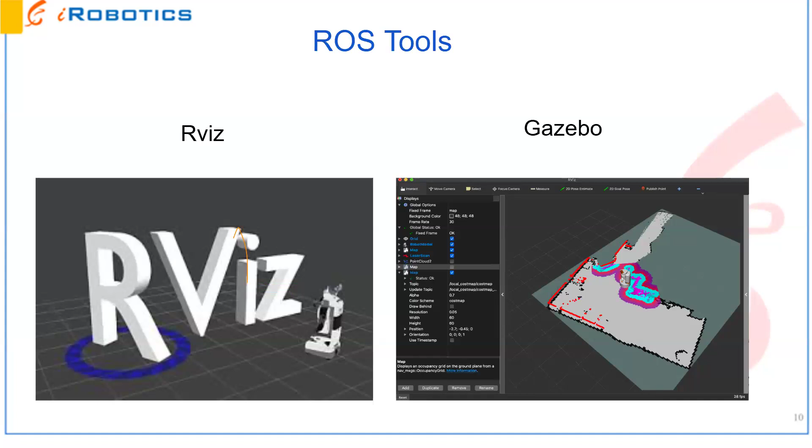Okay, so robot operating system—I told you all what it is, but how exactly does it work? There are a few concepts we need to know to understand ROS. First is a node.

So the topic is in the middle, between one node and another node. But what is the data that is getting sent to the topic? That message, that data which is being sent to a topic, is called a message. And we have two sides, two nodes.

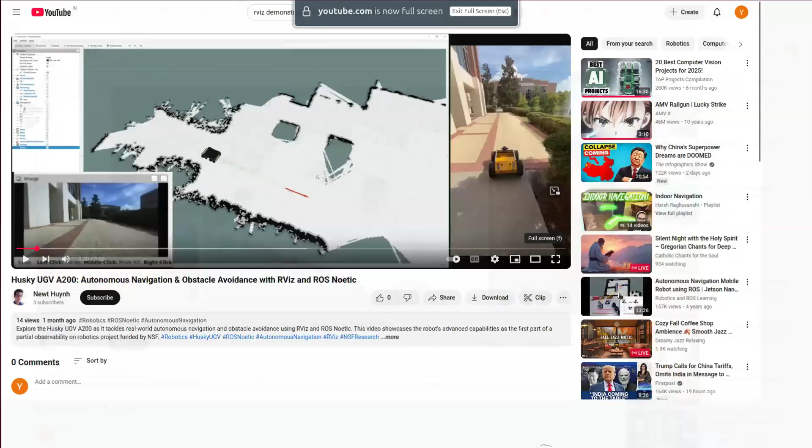Okay, so I'll show how it is actually implemented in real life. Before that, I can show a video that we have done. We have implemented ROS in Vision. So this is the Linux environment. Here we are using ROS 1. This is the main process that you need to run to start ROS in ROS 1. After this, you need to source the virtual environment.

This is on the Jetson Nano. So we had an external SD card, and we need to say you have to look into this SD card. Then again, you can see I'm looking at ROS topic list. Now we went to a certain directory on the SD card. Once I move to that directory, now I can run the script. So this script will open the camera and it will perform a YOLO detection.

Through YOLO detection, we can come to know the XY location of the object. Once we know the XY location of the object, we can send that data to a topic, and we can subscribe to it from another place. It can be anything that subscribes to it. Here we have done it on the same PC, but this can be implemented anywhere else. So I'm publishing to this object detection topic. That has appeared now.

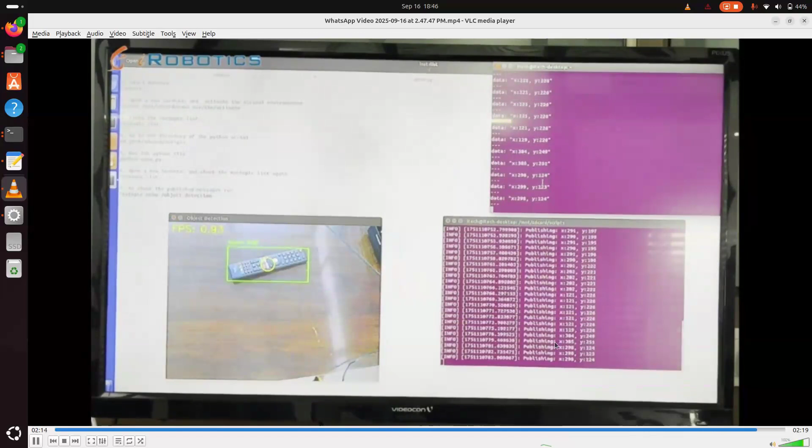And now here I'm using echo to understand what is the data being sent. So you can see here the data is being published. This is the data. And now we will try moving the object, and you can see how the values will update. So I'll just finish a little bit of the presentation that is left, and then we can look at any video.

Good evening, sir. My question is, suppose we are finding a particular object, object detection. Is there any other library other than YOLO? So you can use any library. You can use SSD, single shot detector. You can use any visual CNN, and you can integrate it with ROS. There's no hard and fast rule that you need to integrate it only with YOLO. Thank you, sir. Yes.

The main reason that we use ROS is especially because of mobile robotics, because mobile robotics has a special ROS package which makes navigation very easy, called ROS 2 Nav. ROS 2 Nav makes it very simple to integrate sensors like LiDAR, your accelerometer, your gyroscope, and even odometry, the data from your rotary encoders. ROS can also be used for mapping.

These mobile robots often use SLAM, simultaneous localization and mapping. Localization is basically coming to know where the robot is in an environment, so if the robot is placed in a room, it can know where it is in the room. And mapping is basically understanding the surroundings. So with SLAM, the robot knows where it is in the room as well as the entire surroundings.

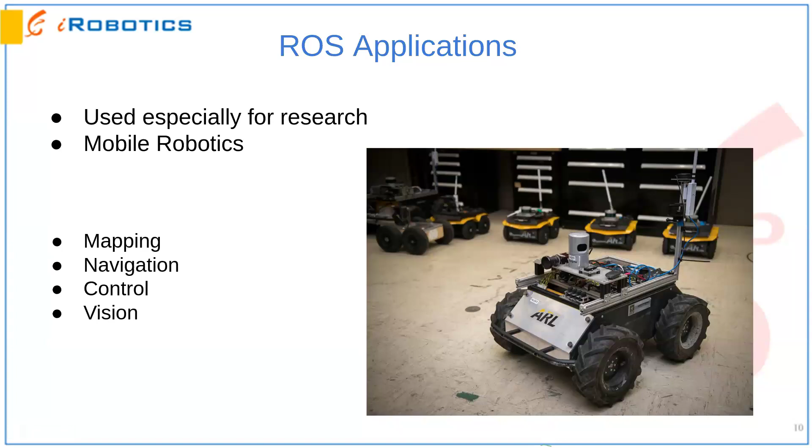So it can be used in mapping. If it detects some object close, it will send data like, I'm 4 centimeters or 5 centimeters away from an object. Then the data will be subscribed from the topic that the sensor has published, and the robot can navigate around. It can also be used in control and in vision. I showed you an example of vision, and I can also show an example of how it is used in real life in navigation through one of the YouTube videos.

So I can show you here. Sorry.

If you may recall, this is RViz, where the robot is visualizing itself. This is a platform where you can control the robot. Here is the camera feed, and here is all the real-life data. You can see the robot moving in RViz, and you can see it moving in the camera and real feed.

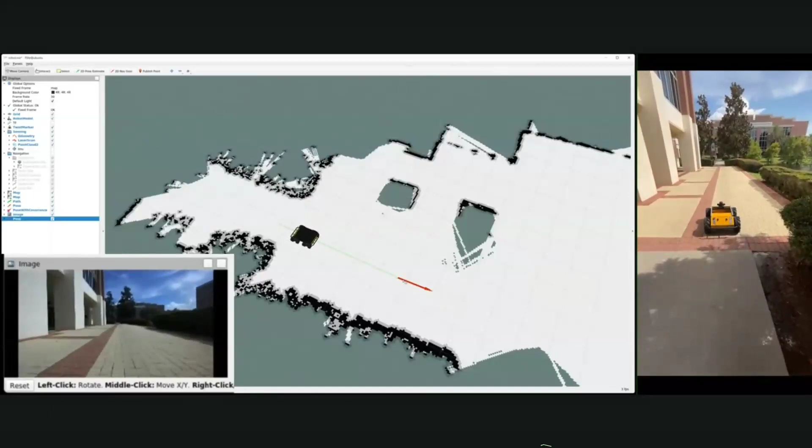There are different types of SLAM. In this SLAM, the map is already provided, so the robot already knows how to navigate, but if any obstacle comes in front of it, it can still avoid it. And if any new object has been placed in the environment, the LiDAR can map it and send it to RViz. So next time another AMR, autonomous mobile robot, goes, or if we require the latest map data, we can send it or use it.

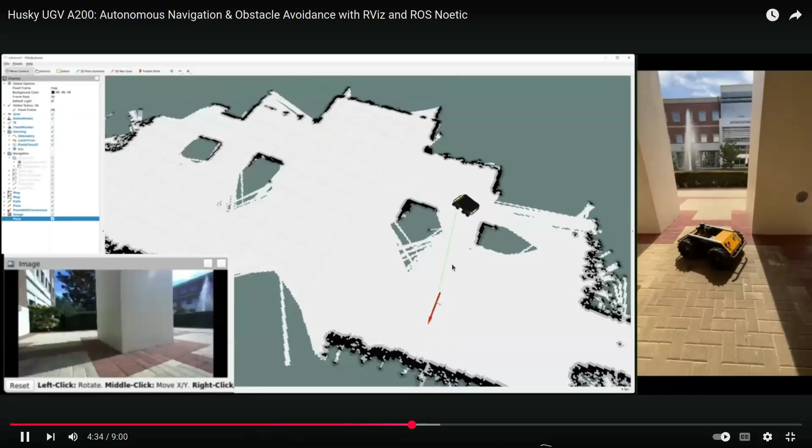So you can see how the robot navigates. As the robot navigates, see, there's a pointer to understand where it needs to go. Sometimes these robots are given a goal, and in an environment they have to map it or navigate through it. So this is about it.

Now we'll explain how RoboDK is used for simulation. Now that you have a basic understanding of how ROS can be used to program a robot, we'll look at how a robot can be simulated, so before we deploy on an actual robot, we can understand how the robot performs with our code.

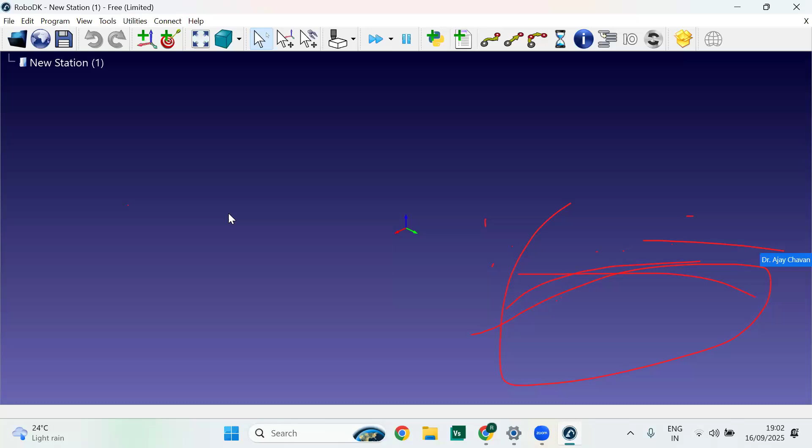So before... I think someone is trying to mess with our meeting, so I would kindly request you to stop doing whatever you are doing on my screen. Okay. If there are faculty available, I kindly request you to talk with your students, because I am seeing this red line on my screen. Yes, sir. We'll take care of that.

Okay. I think I have talked so much about the software. Now it's time to start our simulation. Okay. The first time you open it, you are going to see this window. In this, there are different functions available. There is the import panel. This is the load file, where you can load your robot offline, which is available in your PC. Next, for library access, with this you can directly go to their library and import different robots. Next, you can see the reference command and the target command. Okay, you can have different views like top view, right and front views. Okay.

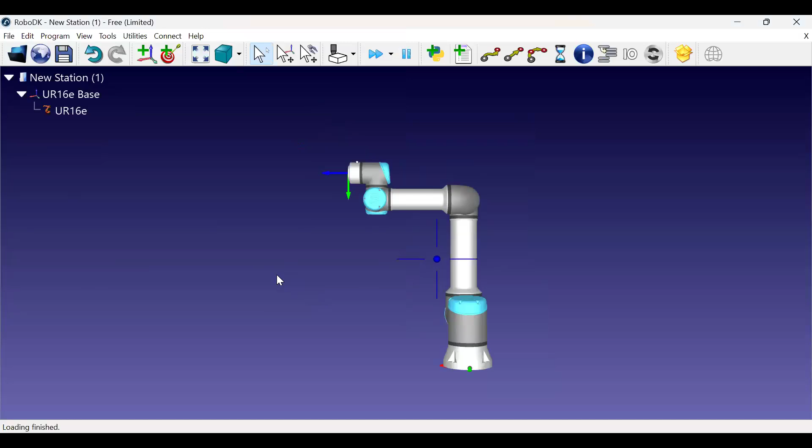As you see, there are specifications you can see here. I will choose this one, download. Okay, I have downloaded this robot. Now we are going to use it in our robotics software. First, just open your file, go to downloads. As you can see, this is the robot we downloaded. Just open it and you can have your robot in your simulation environment. You can try to play with this with your mouse. Okay.

This is... Hello, sir. Yes. Can you please repeat how we got the robot? Okay, fine. Yeah.

Just click here. You will go directly to the web page of the RoboDK library. Now you can select directly any robot available from here. But just to show you how you can choose the robot you want, I will go to brand. Choose any one of them. Previously I chose Universal Robots. Let's see another robot. Let's go for the ABB one. As you can see, these are the ABB robots. Now let's try to choose one.

Actually, it is not showing on screen, sir. Okay, let me see. Okay, sorry. Can you see it now? Yes, sir. Okay. Yes.

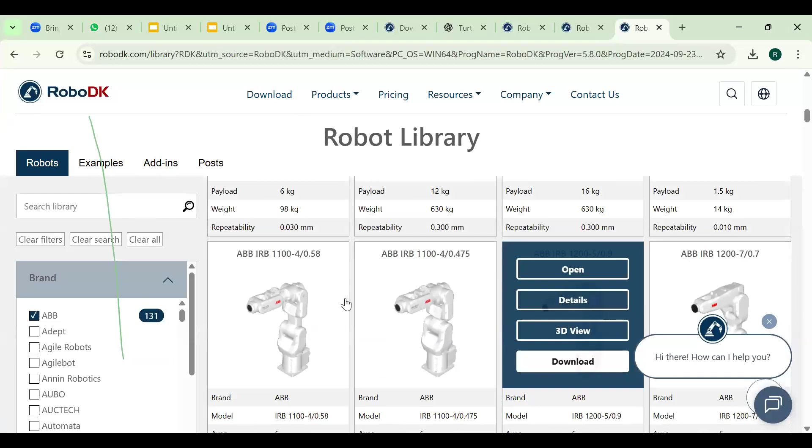Once you go to the RoboDK library, you can find different robots. All you have to do is just download any one of them, right? You can see different robots and choose whichever you want. I will just go with this one. It's downloaded. Now we will go to our RoboDK software. Now just go to the file, just open. In your download folder, you can see the robot you downloaded. Just open this and you have your robot right in front of you.

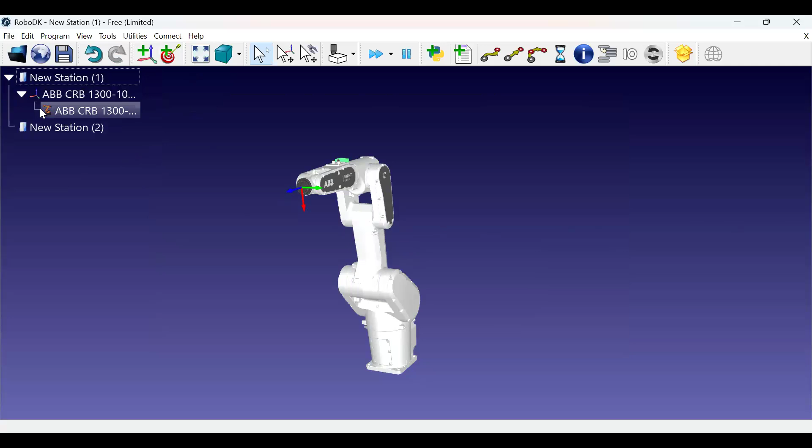Now let's take a look at what we see here. This is a simple station folder in which, if you want a new one, you can just add one here. As you see, it is an empty station now. Let's go with our imported robot. Next is the frame of that robot. Before discussing the frame more, I would like to show how you can control this robot, because when I started, I also wanted to know how we can control this robot.

So as you can see, there is a Cartesian jog movement and the joint axis movement. These are the two most basic methods we use for operating or controlling the robot. In the first, you can control a robot with the XY coordinates, and the second by giving motion to a specific joint only. Let me show you. Right now, I want to move it using Cartesian jog movement. If I take my mouse, click here and scroll up and down, you can see the robot is moving in XY. If you see carefully, different axes are moving at once.

All right. Let's go for Z. So here different joints are moving at once, and they are trying to move according to the tool's endpoint location in XY coordinates. And now let's go for the joint axis movement. If you see, there are different joints.

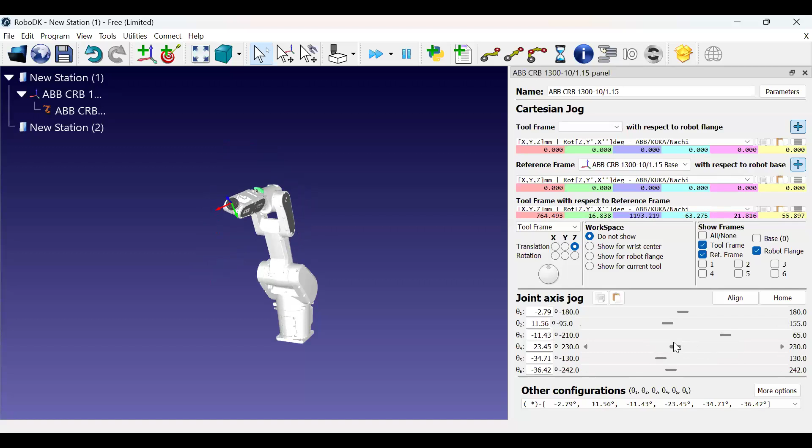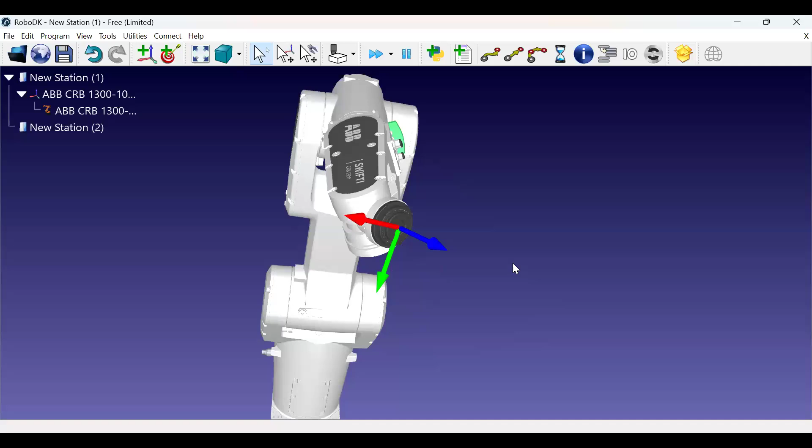Okay, another way of controlling this robot is to go to its reference frame. As you can see, this red, green, and blue are its reference frame. If you press the Alt key on your keyboard and try to drag it, you can also directly move and drag the robot.

Okay, now we have got our robot, but just playing with an empty robot is not that interesting. So we are going to create a robotic cell where we are going to do a simple program of spray painting. Okay, rather than creating a large system, I will just create a small system which will demonstrate how we can create a simulation.

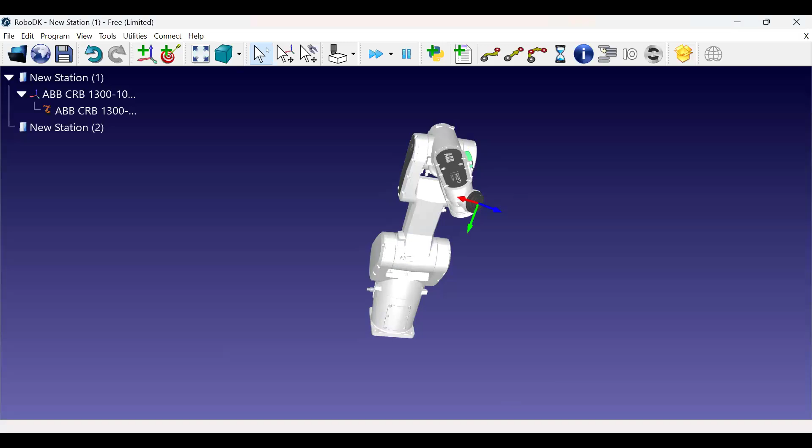Okay, now here I am again on the RoboDK website. I will go into the library first. I want to have some tools for my robot, because in real life we are not going to use only a robot. We are going to use different tools for the specific application. Right now, like I said, we are going to do a basic spray painting operation.

Okay. Okay, as you can see, there are tools. There are different tools. This is a laser cutting tool, grinding tools. Okay, there are different tools available. But what do we want? We want a spraying tool, which is a spray gun. Okay, so we will try to look for it here.

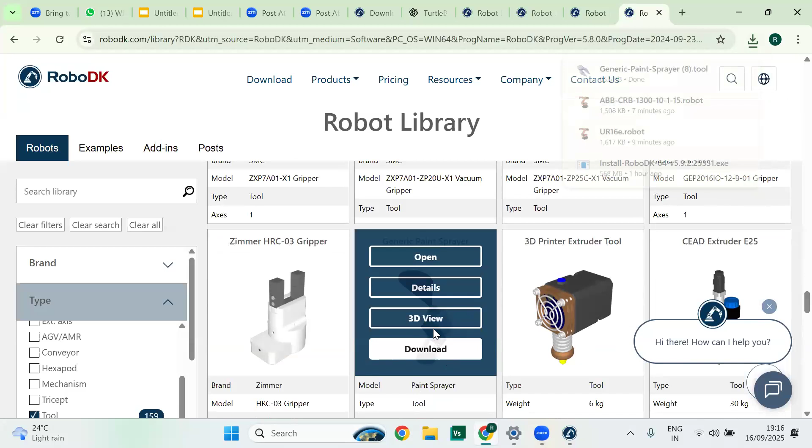Okay, as you can see, this is a paint spray gun, and this is what we need for our first program. Okay, now I have a tool. Okay, now I have downloaded my tool, but I want to import it right here. You don't have to do that much; just like we imported the robot, we have to import our tool, and as you see, it is directly attached to the robot arm.

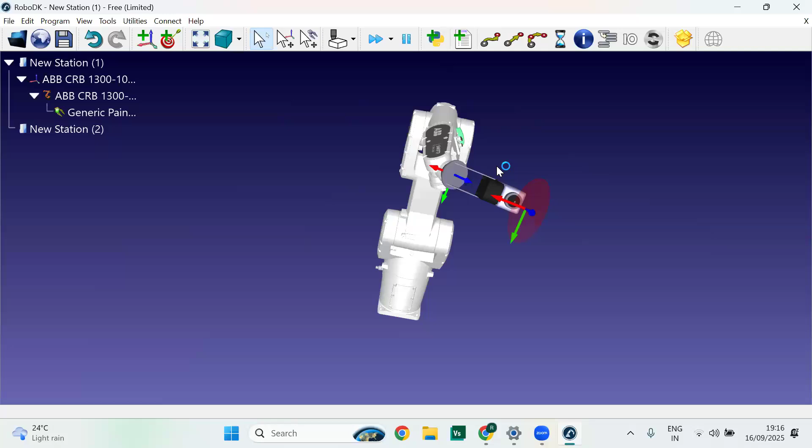Okay, it is directly attached to the robot arm. Why? Because the tool is programmed where its joint should be. If you just double click on the tool, here you can see the flange. It means the tool is going to attach to the robot flange. Okay.

Now I have a robot, I have a tool, but what am I going to paint? Okay, so again I will go to the website. Okay, now I want to have one object which I can paint. Okay, let's go to the objects. Here you can see different objects.

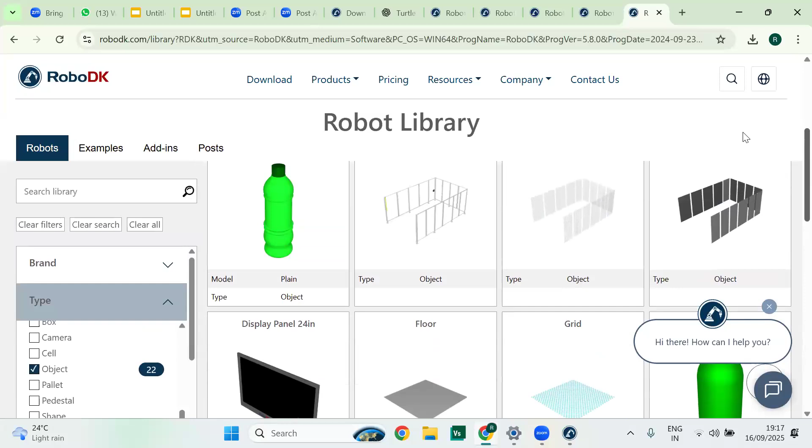You can choose any object from here, but to show you the different movements of the robot, I have created my own object previously. So this time, rather than getting an object or design from RoboDK, I will also show you how you can use your own design in the simulation software. Okay. For it, you don't have to do anything. You just have to make sure that you have a STEP file ready in your PC to import here.

Now I will go to the library. Okay. There are different robots I have previously downloaded. Now I'm going to use this object. Okay, this is a STEP file of a design. I am going to open it. Okay, as you see, this is a curved object. Okay.

Now when I import it, it is directly located at the base of the robot, but I have to move it away from the robot before starting any program or simulation. So here we are going to discuss an important term in this robotic software, which is frames. Okay, so what is a frame?

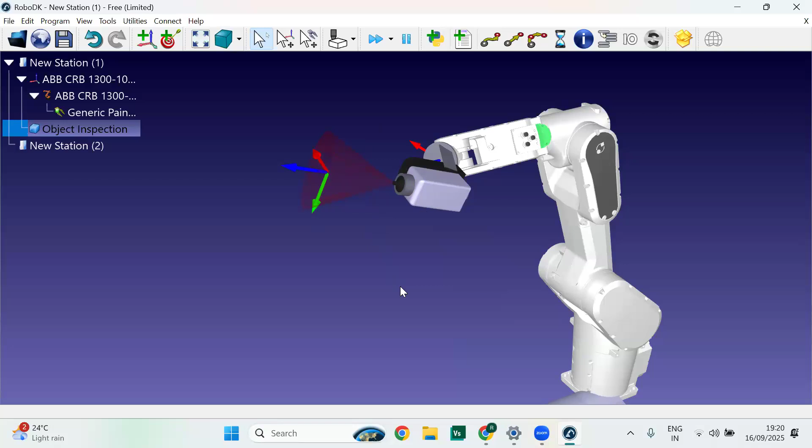So we have everything. First, I will adjust all of these according to my needs. First, the robot. Okay, I will just move different joints. Okay, let's see from a different view how it looks. Okay.

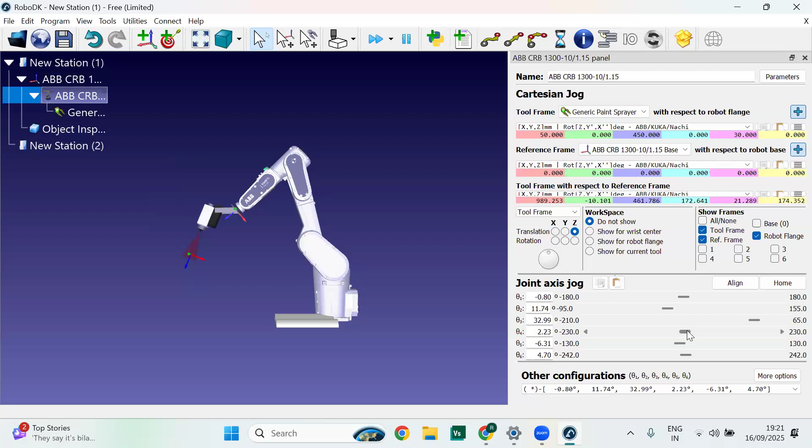Okay. I have just adjusted my robot according to my need. Okay, now let's adjust this object. Just double click on the object. You can see the coordinates of the object. Okay, now let's come back to our topic, which is frames. As you can see, these red, blue, and green are nothing but our origins, the origin of that tool, robot, or TCP.

Let's look here. We can see which object is which object's reference frame we have just opened. Here is the object inspection. If you see the reference frame, you can see or unsee it from here.

Next is to select with respect to which it's going to move. Like if we have a chair, and we are going to sit in a fixed position, we have to move according to the location of the chair. So just like that, if we are going to move our robot, we have to have a fixed point to reference, to which we are going to place our objects.

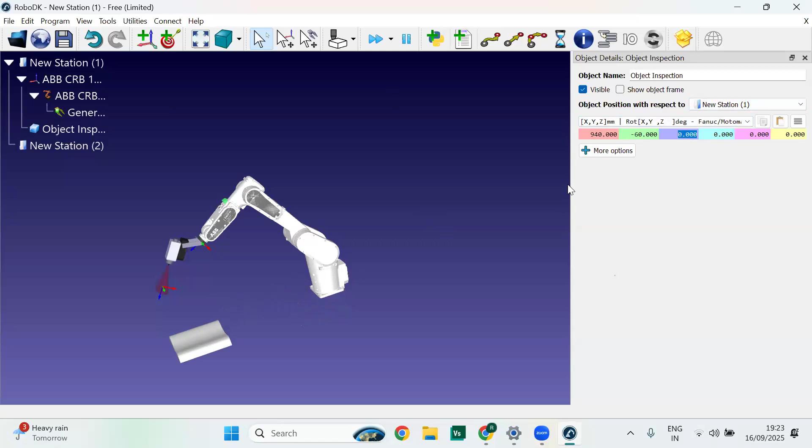Now I have placed my object, but I want to check whether it's in reach or not. Here you have the function available to check its reach. If you don't see it for the first time, you can right click and add it from your workspace. Show workspace, check, where you can see it is within its reach. There you can see the different circles here for different endpoints.

So we have our small system ready, which is needed for a basic simulation. Now, until now, I moved the robot manually, but I want to create a program in which the robot will move to the points I have given it. Okay, so first,

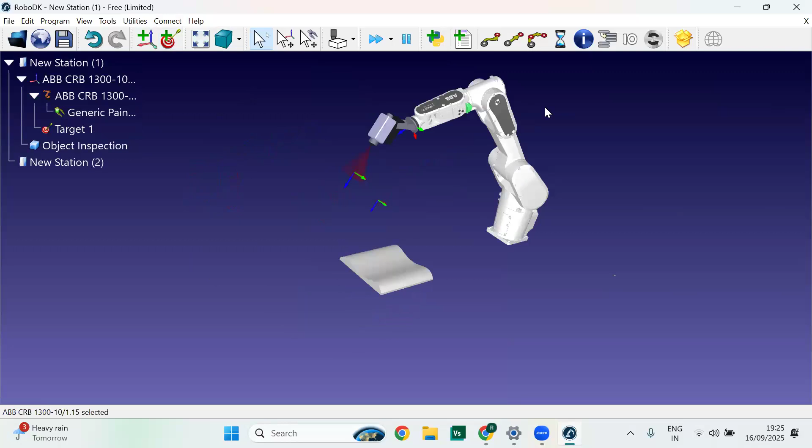you can see here a target option. If you click right here, you can save this position as one of its targets. If I move the robot again, just click it, I will move away. Now load it, just click on it, and it will come to that position according to the same joints it was in previously.

Now, how are we going to use this target to move the robot according to this surface? The robot has given us one function called teach on surface. With this command, you can directly go to any object and select its position as a target, or the point where you need to take your robot.

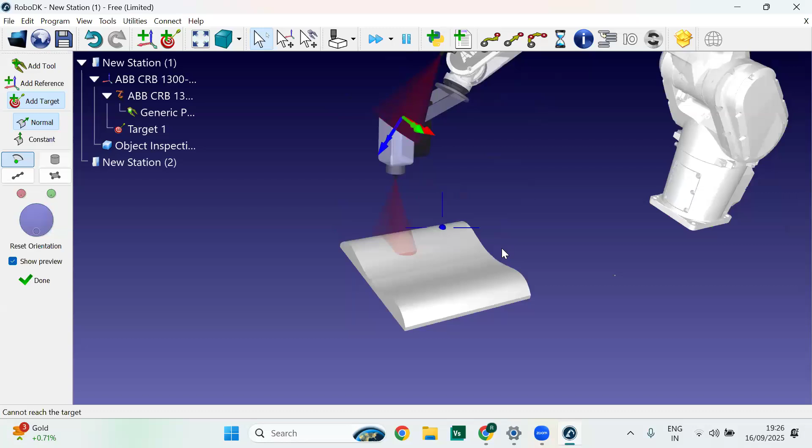If you see from the front view, you can get to know. You can see how the robot is adjusting itself according to the surface. It's always trying to stay normal to the surface.

So you can use this command when you have an object placed in different orientations and want to move it according to a curved surface or any kind of shape.

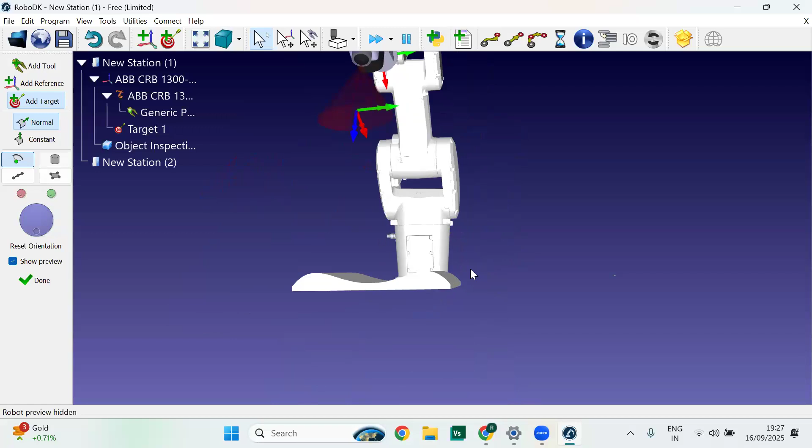So first, before creating the program, I want to have one home position for my robot. So I will also add a new position.

I want to save this position as my home position, which is far away from my object. I will save it as target and rename it home position. Now, I previously selected one target here, so I will also rename it as a safe point.

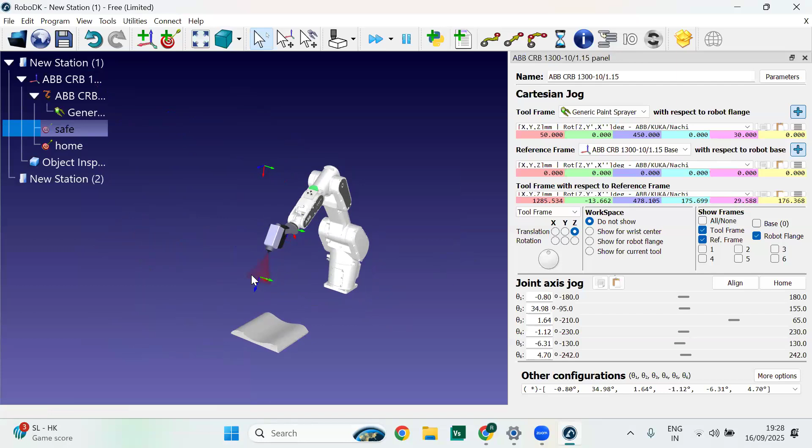When we are going to perform a program, we never directly go to the exact position. We use different positions. The basic position is the home position, from there to a safe position, and then we go to the pitch position where the spray painting or different operation happens, which can be anything like drilling, welding, or even grinding.

Now I will go to program, select teach on surface. As you can see, the robot has directly come to the teach point. I will select this one first,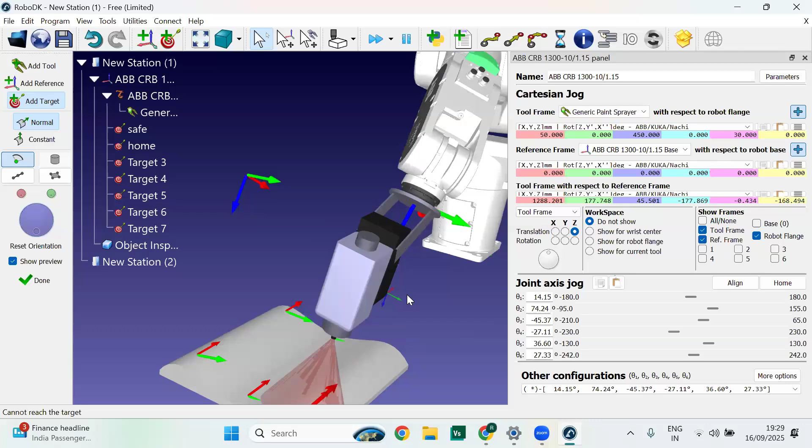then second, third, fourth, fifth, and the last. Now we got different ones. Okay, the last one is not there.

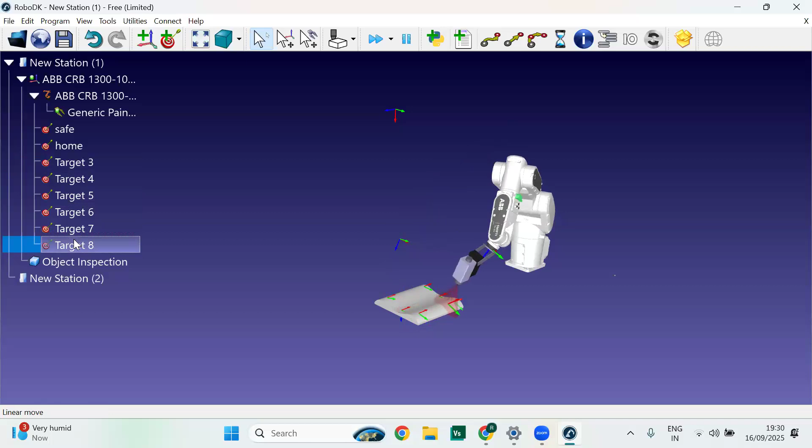Then now we have different targets or different coordinates to move the robot. Let's try to check there. Now you can see how the robot will move when we create a program. Right now I am dragging the robot manually by clicking on the positions.

But now the next step, I want to create a full motion of this spray painting operation. So here is where we can use the command function. I would also change the name of these. To know what these targets are for, I will go to rename group and select them as paint.

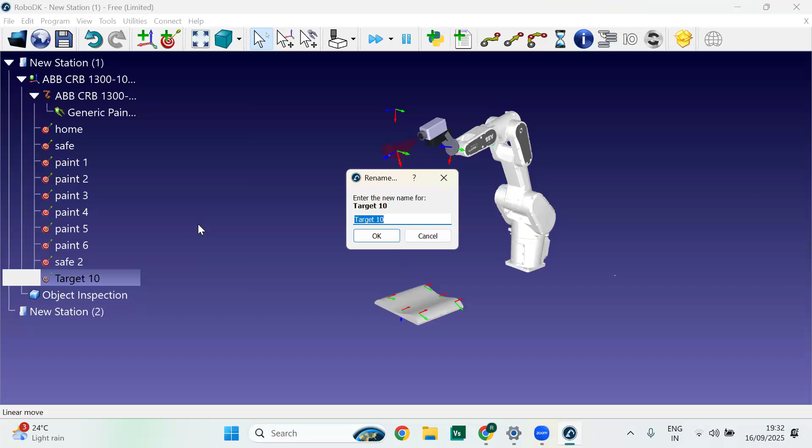Okay, now we have all the points we need for our program. Now we are going to create one basic program. Let's select all these. Now just right click and you can see the create program option, or you can even go from here.

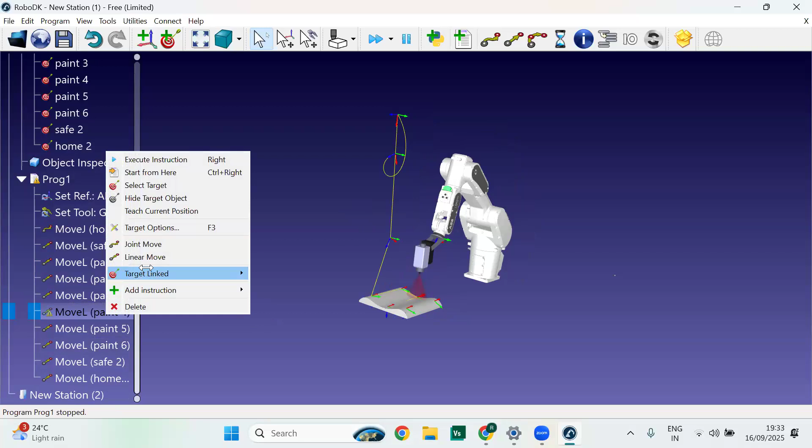Now you see how the robot will move if we program it according to this point. As you can see, there is a problem. You just have to change its motion to solve this, from linear motion, to give it some more freedom. Okay, I will run this again.

Okay, as you can see how it's going to run. Let me show you again. As you can see, it's moving like this. We don't want it.

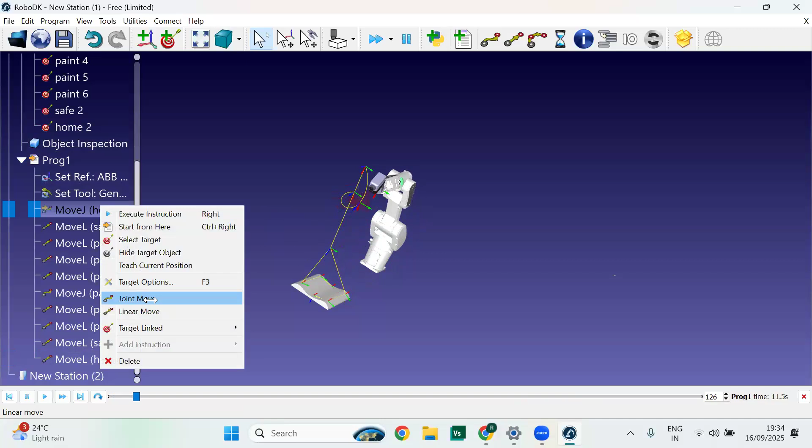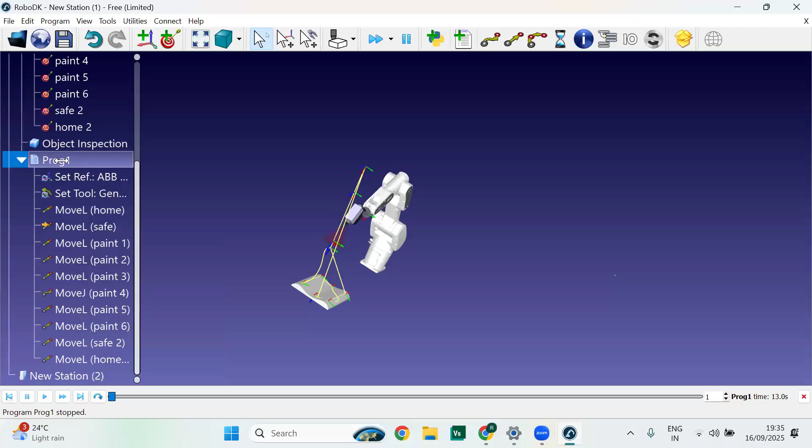Okay, now it's going to move straight. We can change another motion from here and test what kind of curve movement it can have. Just again, make it linear. We want simple.

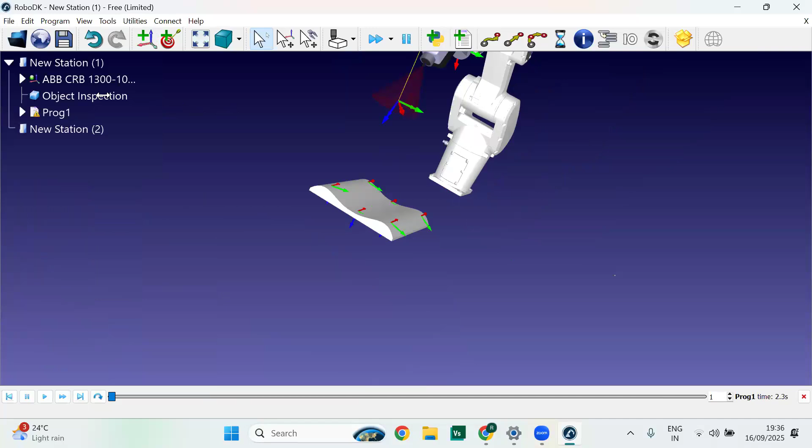So this is how you create a basic simulation program. Right now, after this, you can even export your simulation, or create a robot program from this.

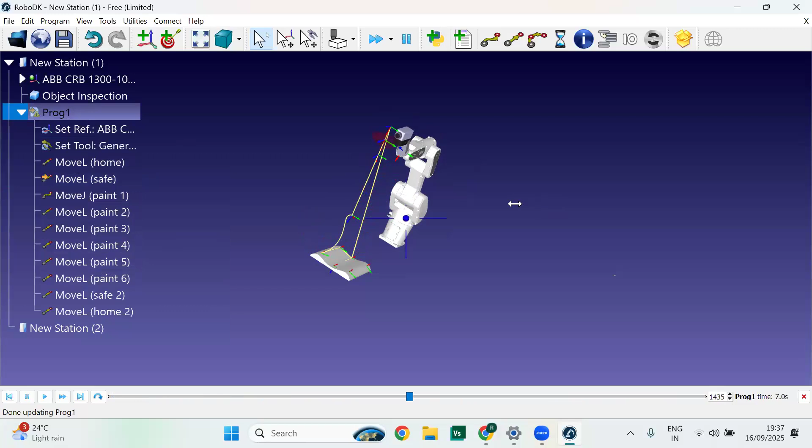So this is what you need to do if you are going to start with the RoboDK software. When you are going to learn a new software, it is just like you are going to play a new game. The more you play with it, the more you are going to understand it. The first thing you need to do for RoboDK is to install it on your available PC.

You can directly go to their website and download the RoboDK software. Here you can get the direct option, which is the free software with a 1 month plan. You can use and try the RoboDK software for 1 month. Try to do different simulations.

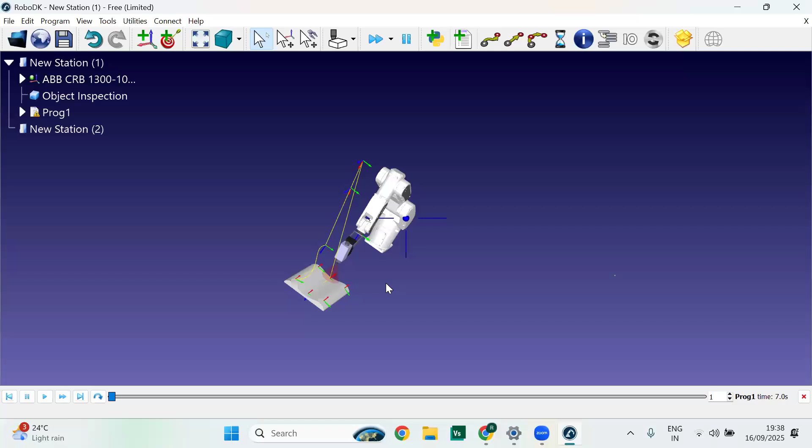You can also easily access a YouTube playlist for RoboDK software, where you can learn more about how to use different functions of the software. Today I have just shown you one basic simulation program, which takes less than 15 minutes to do. I will try to recreate this same program very fast, so you can see that rather than being hard simulation software, it is just like playing a game.

Okay, now let's start with a new station. I hope everyone can see it. New station. Now I'm going to add a robot.

Sorry to interrupt you, sir, we have the next section in line. Yes, yes, I'm just going to show them very quickly. Okay, yes, sir.

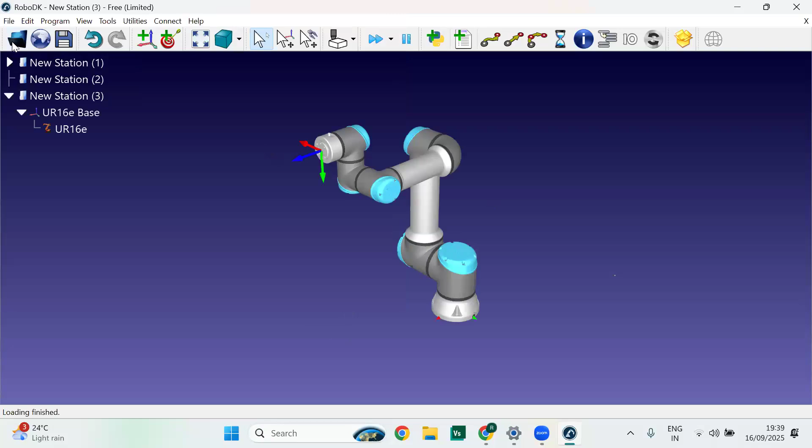Okay, now the robot is done. Tool is done. Done. Object is done, let's move it. Okay, save this as a target. Go to program, switch on surface. Okay, done.

Select all these targets, go to create program, and then you've created your program. It was very quick, you can say even less than 5 minutes. You can see the movement of the robot in the program we just created.

Well, with this, I would like to conclude our today's meeting. I hope you understand and will try the RoboDK software. It is a very easy one, and anyone can start with RoboDK software. There are multiple videos available on YouTube. Since you have another lecture, I will not take much more of your time.

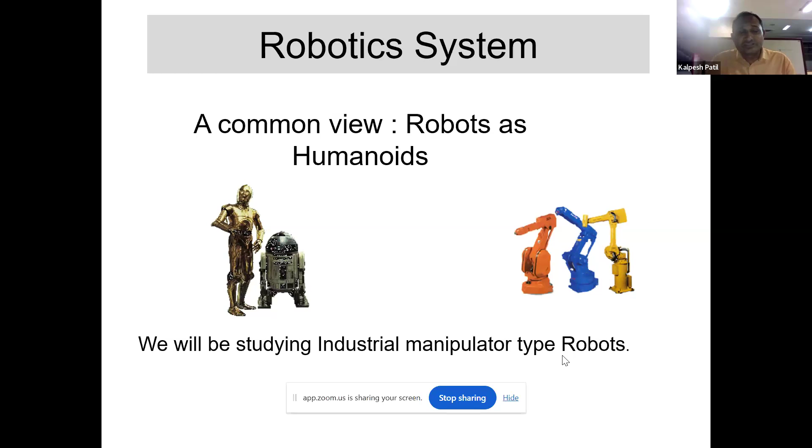We'll be studying industrial manipulator types of robots, which are mainly used in construction and manufacturing fields. Basically in construction, we have to use various types of plants and machinery which have robotics, which save our time and cost, and up to the satisfaction of the customer, we are able to handle the projects easily with robotics and automation.

Basically, the robot classification is according to their use and various definitions given by the Robotics Institute of America. It is variable sequence robots, playback robots, numerical control robots, and intelligent robots. Variable sequence is a device that performs the successive stages of a task according to predetermined methods. Playback robot is where a human operator performs the task manually by leading the robot. Numerical control is, as per the name, the operator supplies the movement program rather than teaching it the task manually.

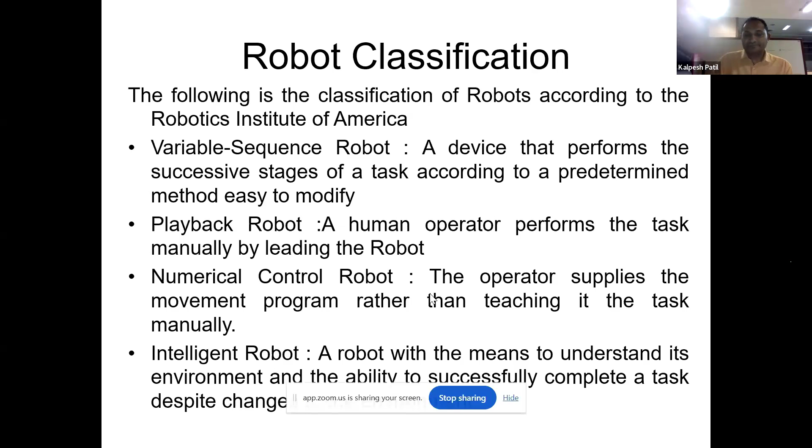And intelligent robots in use nowadays are very much familiar and popular among the industries. A robot with means to understand its environment and the ability to successfully complete a task despite any changes. It is defined as a reprogrammable multifunction manipulator designed to move material, parts, tools, or specialized devices through variable programmed motion for a variety of tasks. It possesses certain anthropomorphic characteristics such as mechanical arm, sensors, and intelligence to make decisions. The third one is very much expected from these robots, intelligence, so that we can complete our work with minimum efforts.

Basically, in the robot accessories, these are the parts which are mainly available in any type of robot system. It consists mainly of the manipulator, which may be called a rover. This is the main body of the robot, and it consists of links, joints, and structural elements of the robot. The second part is the end effectors. This is the part that generally handles objects, which directly touches the objects, makes the connection to the other machines and performs the required tasks. It can vary in size and complexity from end effectors on the space shuttles to a small gripper. It depends on the actual use of these robots and applications.

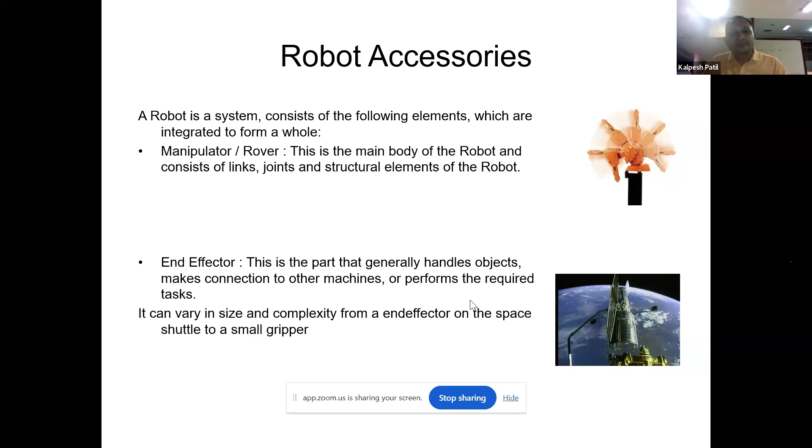Actuators are the muscles of the manipulators. Common types of actuators are servo motors, stepper motors, and pneumatic cylinders, by which the program is easily handled. Sensors are used to collect information about the internal state of the robot or to communicate with the outside environment. Robots are often equipped with external sensory devices such as vision systems, touch and tactile sensors, which help to communicate with the environment. The controller receives data from the computer, controls the motion of the actuators, and coordinates these motions with the sensory feedback information.

We'll see some robot configurations which are very much popular in the industries. These are the basic configurations available in the industry, so that we can decide what type of robot system is required for our applications. In industry, there are so many applications or areas where we need such automation or robotic systems to develop at our site. Mostly, these are the configurations explained here, which has the rectangular gantry, very familiar as the Cartesian system, which has three linear joints that orient the end effector, usually followed by additional revolute joints.

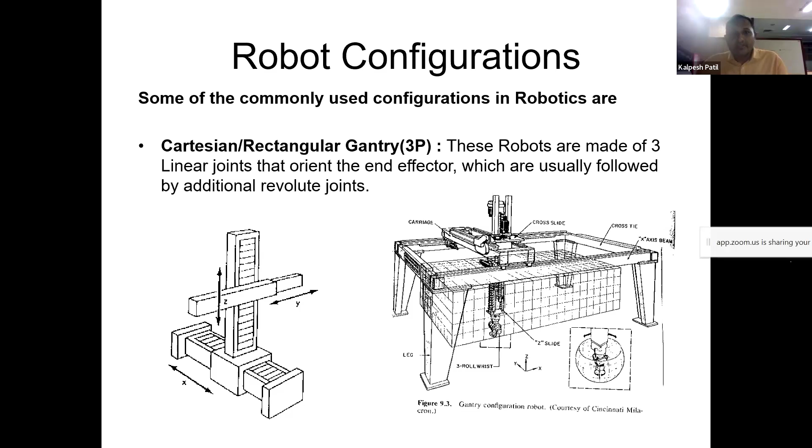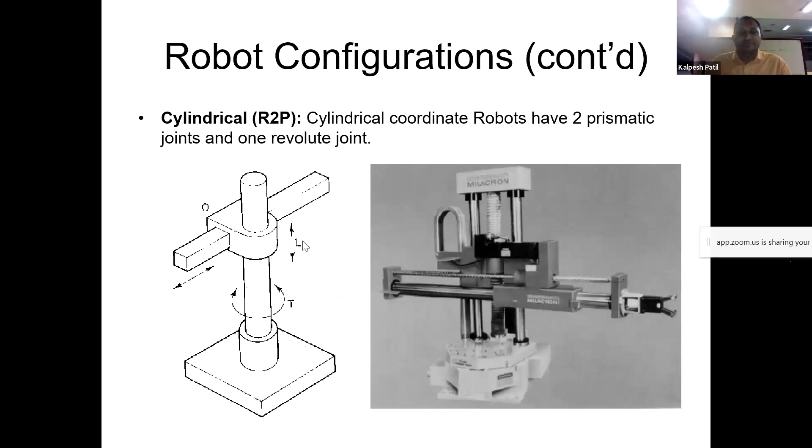This is the second popular configuration, which is called cylindrical, having two prismatic joints and one revolute joint. This we can see in this picture. One is revolute and two travels are given. This is the cylindrical robot work envelope. Here the work envelope is developed by this circular motion, horizontal reach, and vertical reach. That means three movements, three areas are covered by these cylindrical robots.

The envelope is like this. We are covering this horizontal stroke, vertical stroke. In the plan and elevation, we can easily see how much area these robots can capture for our work.

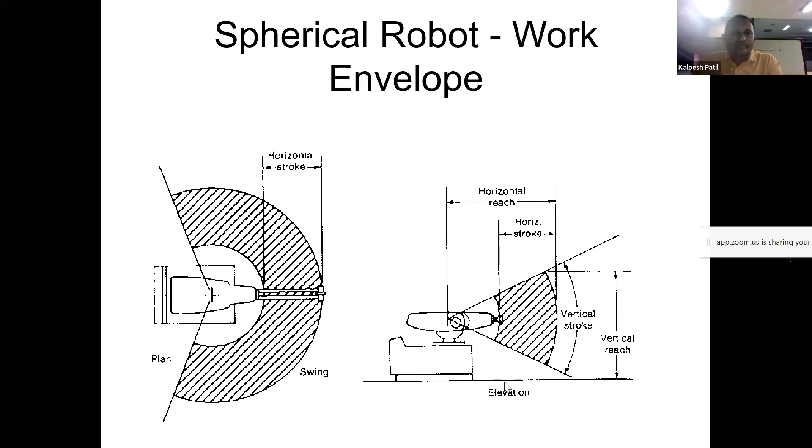This is SCARA system, very much popular. Selective compliance assembly robot arm. They have two revolute joints that are parallel and allow the robot to move in a horizontal plane, plus an additional prismatic joint that moves vertically.

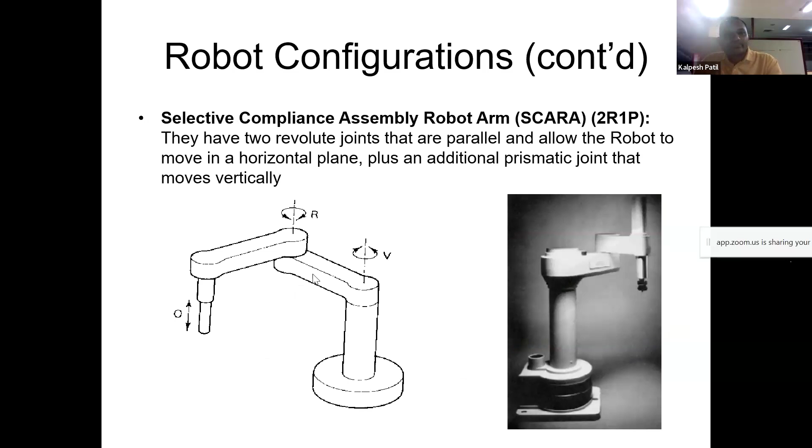Another is the reference frames, which are given in world reference, joint reference, and tool reference. World frame, which is universal coordinate frame as defined by the XYZ axis. In this case, the joints of the robot move simultaneously so as to create motions along the three major axes.

Joint reference frame, which is used to specify movements of each individual joint of the robot. In this case, each joint may be accessed individually and thus only one joint moves at a time.

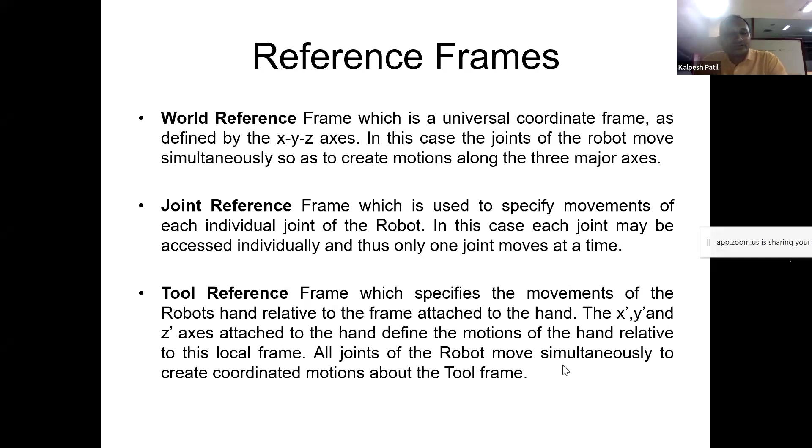Tool reference frame, which specifies the movement of the robot's hand relative to the frame attached to the hand. The X, Y, and Z axes attached to the hand define the motions of the hand relative to this local frame. All joints of the robot move simultaneously to create coordinated motions about the tool frame.

These are the robot reference frames, which are primarily required for ordering of any type of robots, so that manufacturers can analyze our requirement and give the suitable robot configuration and their reference frames, so that proper selections will be done while procuring the robots.

This work envelope concept is very much important, since what requirements are there from your end should be satisfied by these robots. So the proper selection of robots can be possible when you understand the basic requirement of your job and the space availability. The tasks to be performed by these robots are very much important to decide the inquiry.

Depending on the configuration and size of the links and wrist joints, the collection of points a robot can reach is called workspace. Alternatively, workspace may be found empirically by moving each joint through its range of motions, combining all space it can reach and subtracting what space it cannot reach.

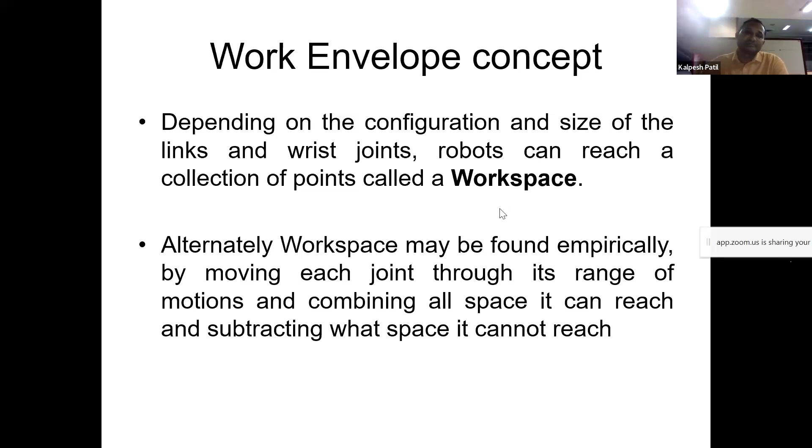Parallelogram jointed. This robot system gives the directions also, what workspace is available by this.

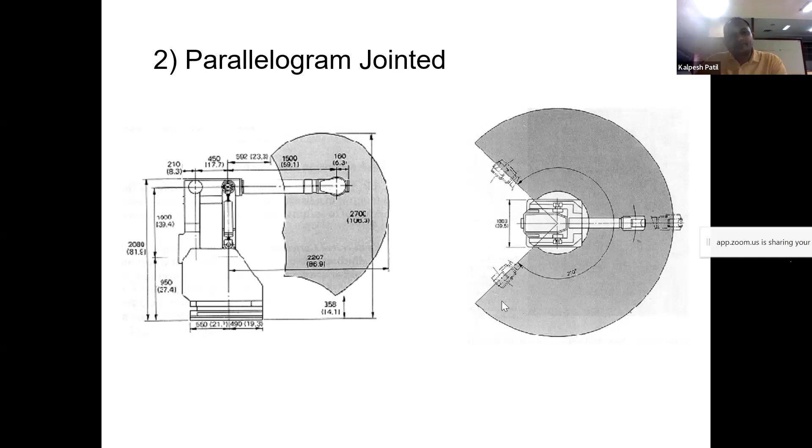Readiness assessment test. This is simply a test. What is your requirement, how you are assessing your requirement, and how you are communicating with the manufacturers. We have to prepare a detailed response for the following readiness assessment.

For example, what type of robot configuration does the ABB IRB 140 robot have? For this robot configuration, first of all, we have to decide whether the manufacturing place is available, and can you find out your...

Sir, your voice is not audible. For the manufacturer, we can ask specific configuration. Hello. Yeah, now it's audible, sir.

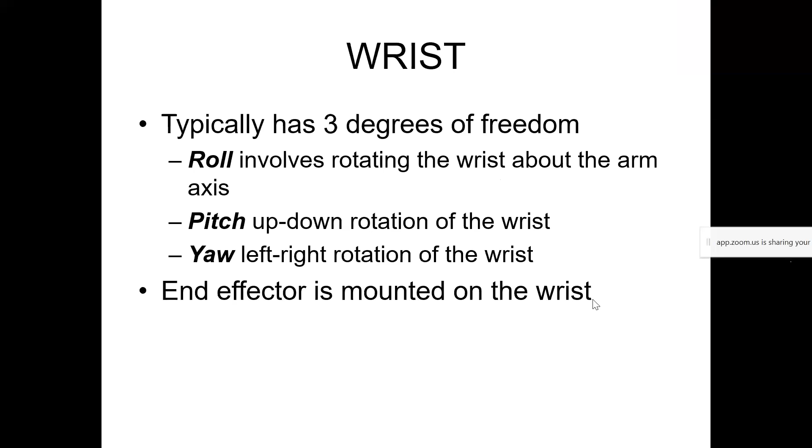Okay. We are discussing these 3 degrees of freedom: roll involves rotating the wrist about the arm axis, pitch, which is up and down rotation of the wrist, and third one is yaw, left-right rotation of the wrist. This movement is very popular in the robots. End effectors are mounted on this wrist.

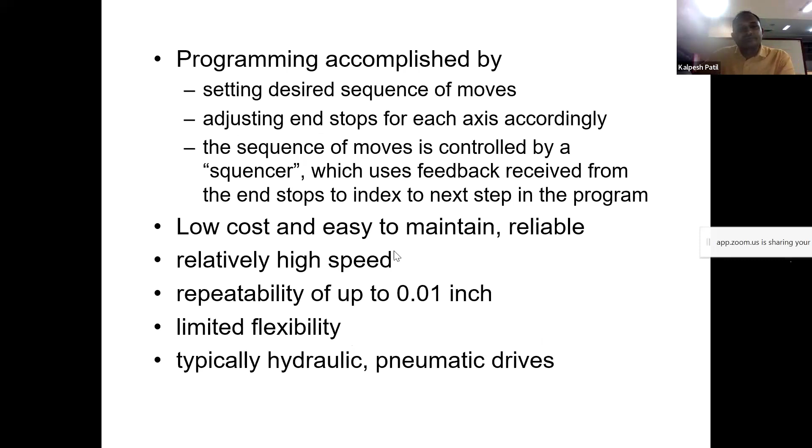Programming is accomplished by setting the desired sequence of moves, adjusting stops of each axis and their sequence in the programs. These are low cost and easy to maintain, reliable, relatively high speed, with repeatability, but limited flexibility. Typically, these are hydraulic or pneumatic drives. Servo controls are basically point-to-point, then continuous path control. These are closed loop controls used to monitor the position and velocity of each joint.

We will discuss this point-to-point control and the continuous path control. Here, only the endpoints are programmed. The path used to connect the endpoints is computed by the controller. The user can control velocity and may permit linear or piecewise linear motions. Feedback control is used during this motion to ascertain that individual joints have achieved the desired location.

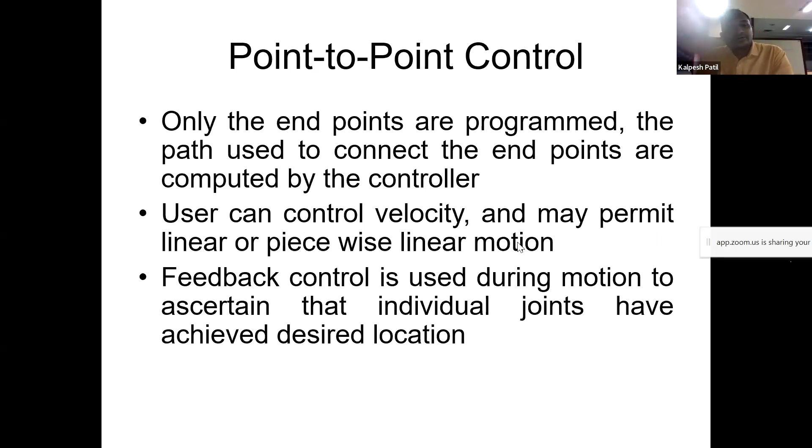They often use hydraulic drives, with a recent trend towards servo motors, as we have discussed. Loads up to 500 pounds and large reach. Applications are pick and place type operations, palletizing, and machine loading. We are seeing this robotics information that is useful in your day-to-day lives while selecting robots.

This is continuous path control. In addition to the control over the endpoints, the path taken by the end effector can be controlled. The path is controlled by manipulating the joints throughout the entire motion via closed loop control. The applications are spray painting, polishing, grinding, and arc welding.

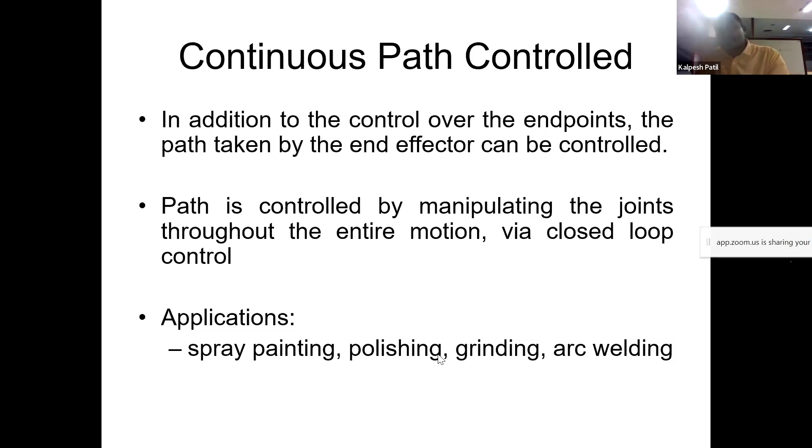We'll see what robotic programs are being developed in so many countries, and the latest development is mostly on these programs. They are typically performed using one of the following, online or offline: teach pendant and lead through programming online. Offline means robot programming languages and task level programming, which are already fed into the robotics.

We'll see the very popular use of the teach pendant. It is a handheld device with switches used to control the robot motions. Endpoints are recorded in controller memory and sequentially played back to execute robot action. It's very handy to use. The trajectory is determined by the robot controller, suited for point-to-point control applications. It is easy to use, no special programming skill required. Useful when programming robots for a wide range of repetitive tasks for long production runs.

There is lead through programming, where you lead the robot physically through the required sequence of motions. Trajectory and endpoints are recorded using a sampling routine which records points 60 to 80 times a second. When played back, it results in a smooth continuous motion. Large memory requirements.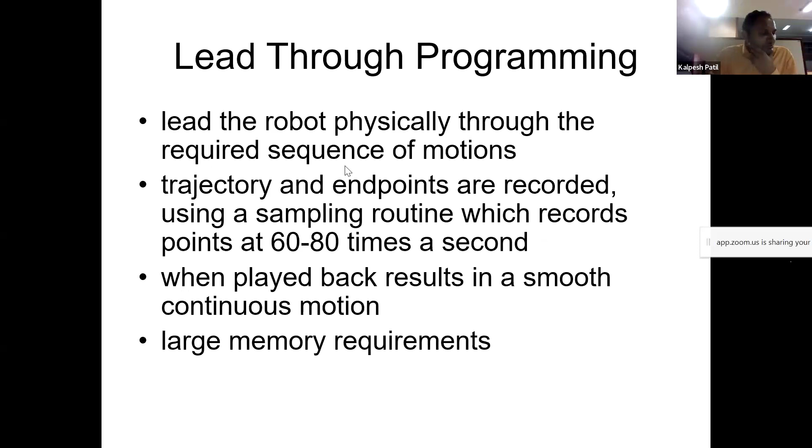These are the programming languages, with the need to interface between the robot control system and external sensors to provide real-time data which changes based on the sensory equipment, computation based on the geometry of the environment, the ability to interface with CAD/CAM systems, meaningful task description, and offline programming capabilities.

In the industries, there are a large number of robot languages available, like the very popular C, C++, AML, VAL, AL, RAIL, Robot Studio. Each robot manufacturer has their own robot programming language. No standards exist. Mainly, it depends on what your applications are. Portability of programs is virtually non-existent.

Here again, from one practical point of view, we can discuss what the activity is, what the use in your industry is, and what the requirement is. Such an example is given here. You have to discuss an activity that you think can be automated by using a robot. Simple, in your workshop, there are some activities. We have to define that activity, and then what type of work or what your requirement is. Then we have to decide what special tools are required for this activity.

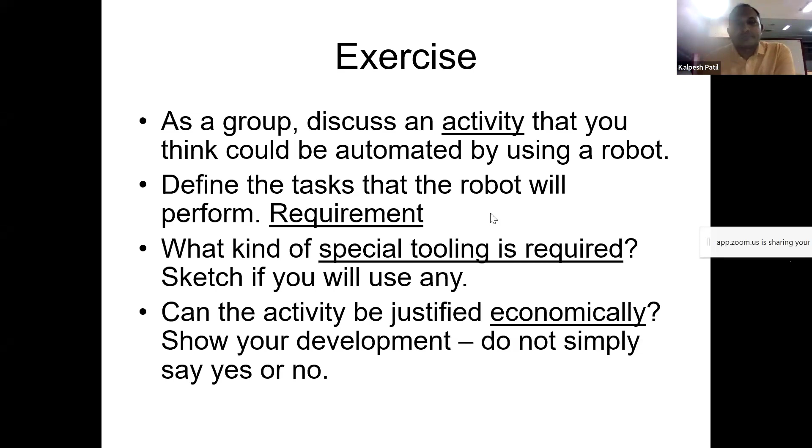Here in the construction industries, many key technologies are available in the market, and their applications are available in the industries. First, robots are used for tasks like bricklaying, concrete pouring, and welding, enhancing precision and speed while reducing labor cost. We'll see these one by one.

Another one is drones. Drones provide real-time aerial data for site surveying, progress tracking, and identifying safety hazards, enabling better decision making and faster inspections. Nowadays, we are seeing drones mostly used for structures at high levels, where humans cannot access the points for inspection. That time we are using the drones.

Artificial intelligence: AI powered machinery is available nowadays in the industries. The software analyzes vast data sets to optimize project schedules, allocate resources, predict risks, and improve overall project efficiency. 3D printing: this technology allows for the on-site creation of custom building components with high precision, reducing material waste and shortening timelines.

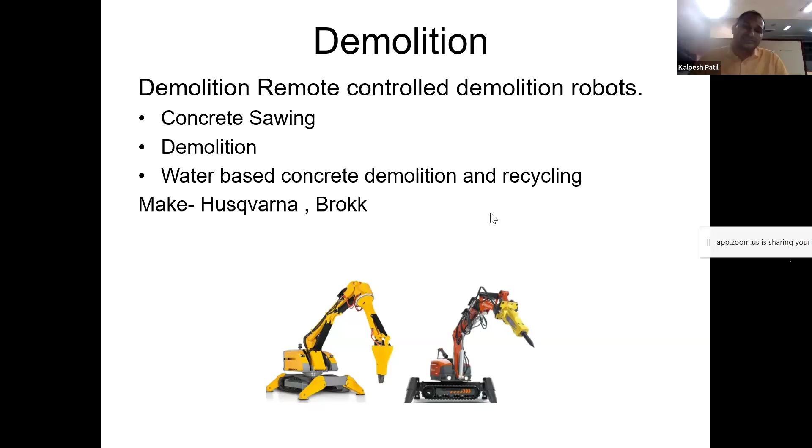These are mostly foreign makes. In India, Indian makes are not available, and mostly clients prefer, according to their budget, Husqvarna and Brokk. But these are very costly. The contractor selects as per their budget.

Surveying. For surveying, drones are especially used for area mapping and surveying construction sites, allow for real-time surveying, improve logistics and collaboration across construction teams. For drones, major manufacturers are Ideaforge, Asteria Aerospace, Garuda, Paras, and IG. We are all aware of these drones. They are very familiar in our day-to-day life also.

In cricket also, game tournaments, various places where the space is abundantly available but we cannot go and access the data from there. These drones are especially used in our constructions. There are so many site levels. In that, we are using drones so that each data and the progress of the construction can be accessed and known.

Paving work. These paving robots are mainly for paving roads with bricks or concrete. They relieve workers from physically straining work and improve efficiency. International players like Fanuc and Kuka Robotics India are the main manufacturers for these paving machines, which are controlled by these robots.

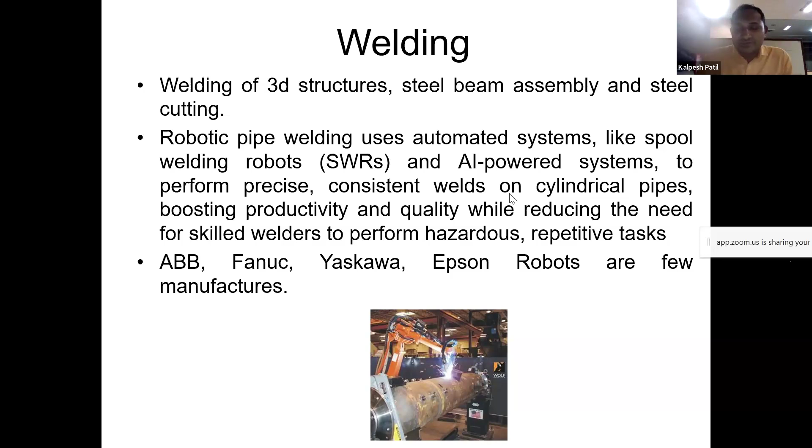Bricklaying robots work in tandem with construction workers, but lay down three times as many bricks as a human. They can lay bricks in unconventional patterns to achieve novel structures. Craftsman Laboratories and FAO Construction Technologies are manufacturers of bricklaying robots for construction projects. However, bricklaying work is done manually in India, and we can utilize these from Craftsman Laboratories and FAO Construction.

Another popular activity is drilling and excavation. We are all aware that in the construction industry, excavation work takes a lot of time, with a lot of labor involved. And nowadays, due to technological automation, we are able to complete excavation works with minimum time, minimum effort, and with accuracy also.

The robot provides accurate, efficient drilling in concrete ceilings and promises less strain on the workers. In excavation, digging and material handling with increased precision and productivity. Companies like Built Robotics and Automation Solutions Incorporated offer systems with sensors. These basically consist of sensors, GPS, 3D site models, and AI to navigate, excavate, and avoid obstacles. This additional feature avoids obstacles: the sensor sends the data of these obstacles and transmits it to the operator.

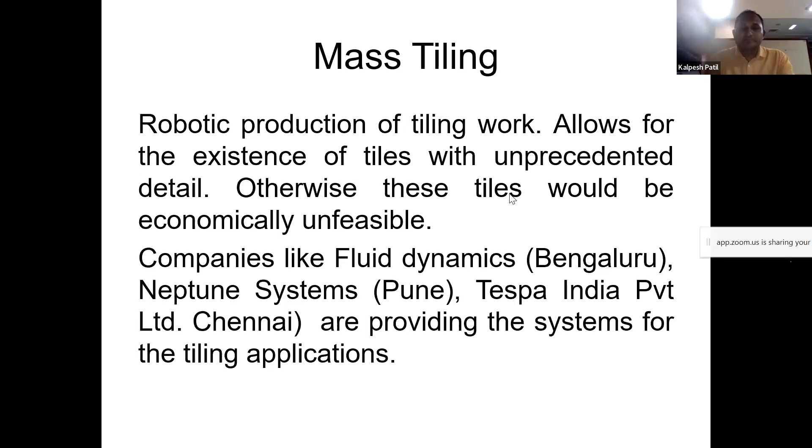Inspection with non-destructive tests, like technical diagnosis of bridges, tunnels, and other structures. They use sensors like ultrasound, sound, X-ray, and cameras to inspect materials and structures for defects without causing damage. We are seeing that non-destructive testing is very helpful for us in inspection without causing damage to the materials. These ultrasonic, X-ray, and cameras inspect the materials directly and give an accurate picture of the materials or pipes, etc.

These exosuits, which we discussed earlier, help construction workers handle heavier loads without hurting their bodies. These soft fabric-based suits are used to increase strength, improve mobility, reduce fatigue, and prevent injuries in fields like rehabilitation, industry, and military applications. Unlike rigid exoskeletons, they use cables and motors to provide targeted assistance that moves with the wearer, offering greater flexibility and comfort. These exosuits have now become popular in industry due to their helpfulness to the workers.

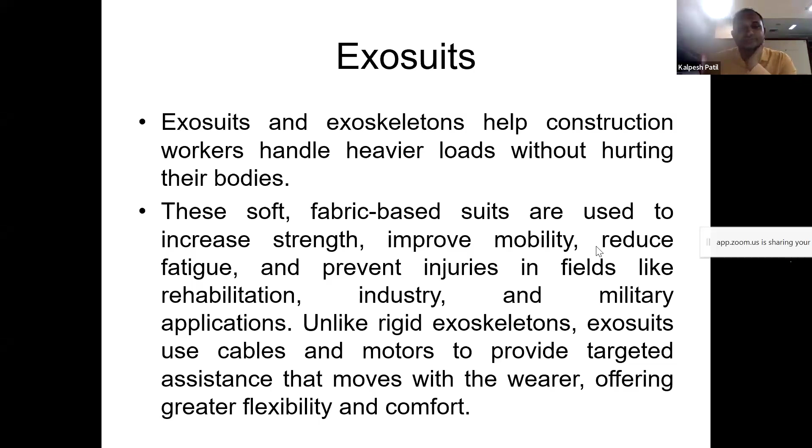Automated factories for prefab and modular construction. Prefabrication robots manufacture prefab parts of the building. In this case, the panels are designed within special constraints of the robot. Factories equipped with automated machinery are producing prefabricated components that are assembled on site. This method reduces waste and speeds up construction. Companies like Katerra are leveraging automation to produce entire modules such as hotel rooms, with design, engineering, component supply, and off-site manufacturing all integrated to deliver them ready for on-site installation.

3D printing in construction. This technology has also become very popular now because it reduces time and gives high accuracy. I will just go through how it works. First is digital design. In digital design, architects and engineers create 3D models of the structures, which are then translated into digital instructions for the printer. The second one is material preparation. Specialized fast-hardening concrete mixtures and other printable materials are prepared.

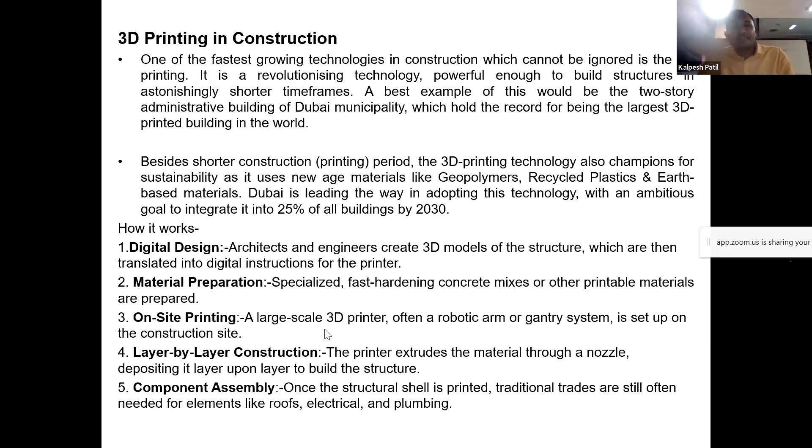Robotics are also used for recycling purposes. This helps in sorting construction material and waste for easier recycling. Another very popular use is automated guided vehicles, called AGVs in the industry. These are segregated into types like trucks, excavators, bulldozers, and cranes, depending upon their applications. First, trucks are being developed to increase safety in construction areas. Second, excavators equipped with computer vision and GPS technology can navigate job sites, dig trenches, remove debris, and load materials with minimal human intervention.

Another is bulldozers, taking over grading and leveling tasks by using laser and GPS systems to create flat, even surfaces with remarkable accuracy. Another is cranes, which with sophisticated sensors and computer algorithms can perform heavy lifting operations and move loads with precision and safety. There is a wide variety as per their applications, like trucks, excavators, bulldozers, and cranes. Other applications in the construction industry are mainly concrete transportation and distribution, positioning of steel, fire resisting, and painting. In painting nowadays a lot of robotics are used, as well as in excavation and earth moving, which we have seen, and in tunneling works.

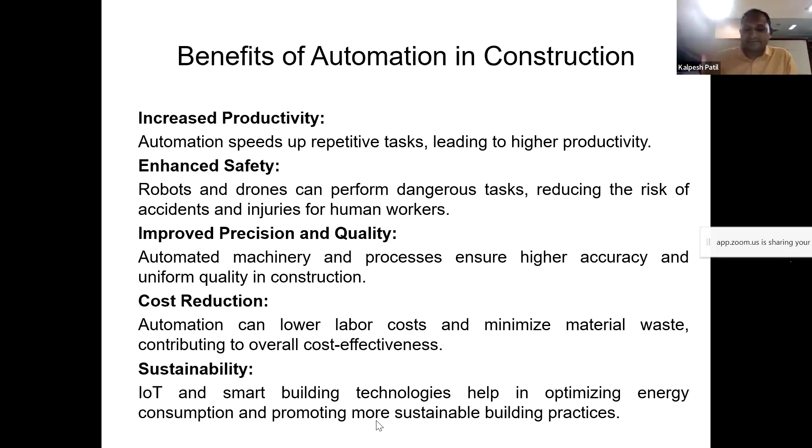Last, I want to share with you the challenges in adoption. We are discussing various robotics configurations, their uses, various manufacturers, and their benefits. But how can we implement it in our real life construction projects? What are the challenges we are facing for this adoption? We'll have a look at this.